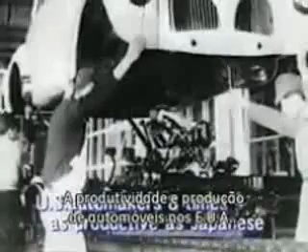That was a daunting task. U.S. productivity in automobile manufacturing was 8 times higher than Japan's, and Toyota was short of equipment and capital. So raising productivity was a pressing issue. Eiji assigned a machine shop manager named Taiichi Ohno to develop a more efficient production system.

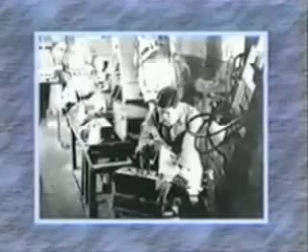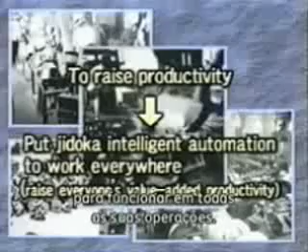The two men looked for ways to raise the value-added productivity of every worker. They did that by putting Sakichi's Jidoka concept to work throughout their operations. They also looked for other ways to stretch their limited resources of equipment and capital, by putting Kiichiro's just-in-time concept to work systematically.

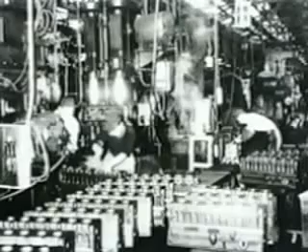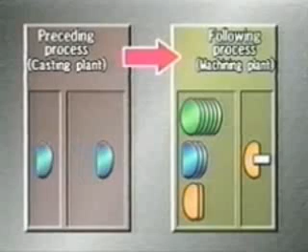Ohno took a cue from the U.S. supermarket. He made each process the customer for the preceding process. In traditional manufacturing, processes delivered parts to the following processes regardless of what was actually needed.

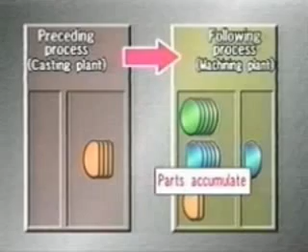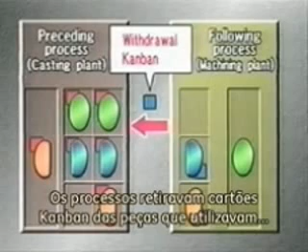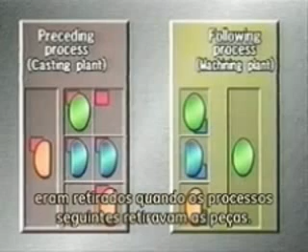Ohno devised a completely new kind of system. Processes used Kanban cards removed from parts they had consumed to withdraw parts from the preceding processes. Kanban on the parts arrayed by processes came off when the following processes withdrew the parts. They became instructions to make additional parts. The Kanban flow ensured that processes made parts only to replace parts actually consumed by the following processes.

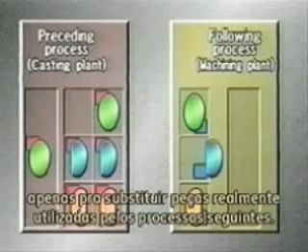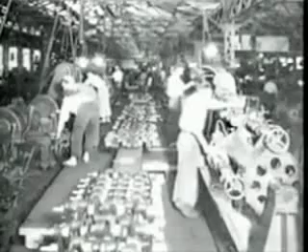Active cooperation by the people in the workplace would be essential to Ono's system. But at first, people were reluctant to give up their old ways of doing things. Ono took the initiative. He went into the workplace and taught people how to use his system. Eiji Toyota supported Ono enthusiastically in putting the new production system in place.

A new production system gradually took shape on the foundation of just-in-time manufacturing and Jidoka intelligent automation. As the Toyota production system, it became a standard for manufacturing industries.

The Toyota production system gained global attention after the oil crisis of 1973. Toyota recovered more quickly than other automakers from the crisis, and its production system received much of the credit for that resilience.

General Motors Corporation approached Toyota about setting up a joint venture to make small cars in the United States. The two companies set up New United Motor Manufacturing Incorporated in California in 1984.

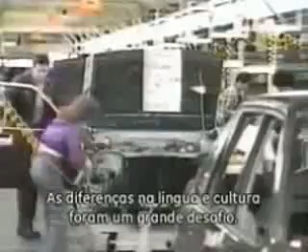Differences in language and culture presented big challenges, but the spirit of making things well knows no borders. People accepted the Toyota production system, and the Toyota GM joint venture became the highest-ranked automobile plant in the United States for quality. It became a symbol of successful industrial cooperation between Japan and the United States.

A book published by the Massachusetts Institute of Technology hailed the Toyota production system as the machine that changed the world.

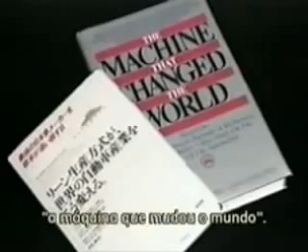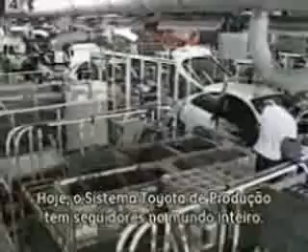Today, the Toyota production system has gained a worldwide following. Let's see how the system now operates in the world's most modern automobile plants.

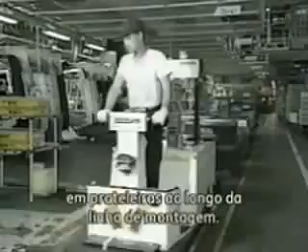The trucks that deliver parts to the plants carry a variety of items in each load. That allows each truck to travel fully loaded, which minimizes trips and thus reduces traffic congestion. Forklifts carry the parts unloaded from the delivery trucks to racks alongside the assembly lines.

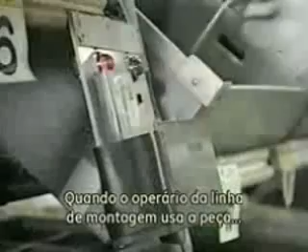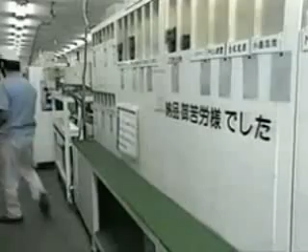When people on the assembly line use the parts, they remove the attached Kanban cards. The Kanban get picked up regularly and sorted. The delivery truck drivers pick up the Kanban for their company or companies before leaving. Back at the supplier's plants, the Kanban become orders for withdrawing additional parts.

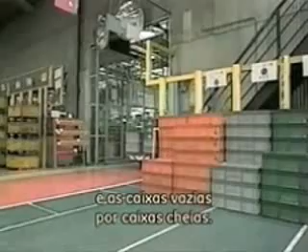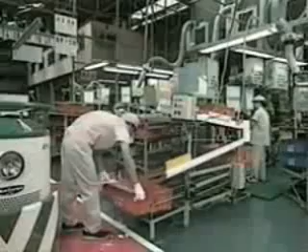Sorting arranges the Kanban according to area in the plant. Shipping personnel exchange the Kanban and empty boxes for full boxes. The production processes in the plant make additional parts only to replace parts that have been withdrawn. That prevents the wasteful buildup of inventories.

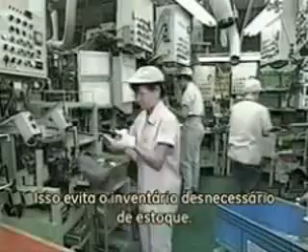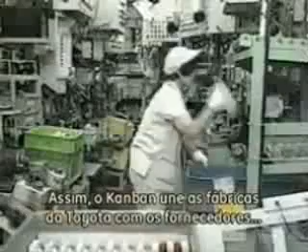When the shipping personnel have gathered a full truckload of parts, a truck carries the parts to the vehicle plant. Kanban thus link Toyota plants with suppliers' plants, as well as linking the processes inside the Toyota plants. Just-in-time manufacturing minimizes inventories, eliminates waste, and maximizes productivity at all the plants that participate in the Toyota production system.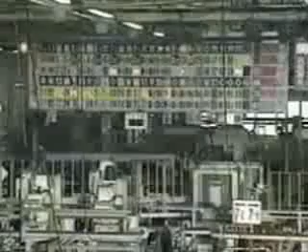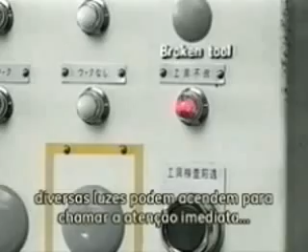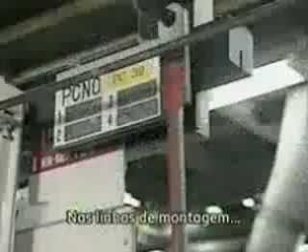Jidoka Intelligent Automation also continues to play a big role in the system. On automated machining lines, numerous lamps light up to call attention immediately to any problems detected by sensors. On assembly lines, the employees themselves have devised countless Jidoka measures to prevent defective work. So Sakichi's concept continues to prevent waste.

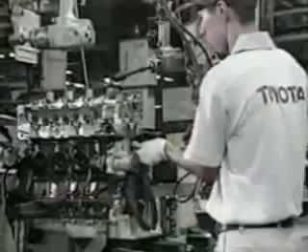The idea is to build quality assurance into every process, and it works.

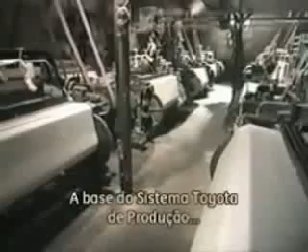The foundation for the Toyota production system has been established by Sakichi's Jidoka Intelligent Automation and his son Kiichiro's just-in-time manufacturing. Taiichi Ohno and others put those concepts to work systematically with the strong support of Eiji Toyota and his passion for manufacturing.

The Toyota production system continues to evolve in response to changing needs and circumstances, but the fundamental concepts are eternal, including Toyota's commitment to continuing improvement in every phase of products and operations. Those concepts underlie a lasting contribution to enhancing the quality of life for people everywhere.